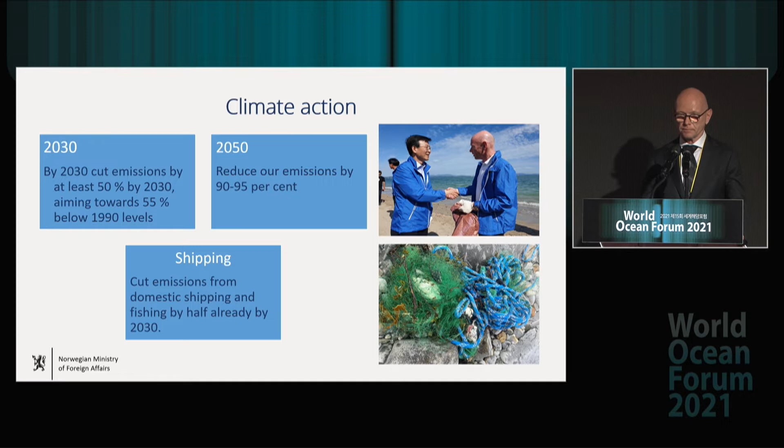If we are to reach our objective of a low-emission society and promote clean and healthy oceans, we must successfully develop, adapt, and implement new technologies in several areas. Emission reductions in shipping can be achieved both through energy efficiency and by using energy from renewable sources and low-emission fuels. Norway's objective is to establish the most efficient and the most green maritime sector in the world. And the change in the maritime sector in Norway is happening fast, as we speak.

The cruise ship operator Hurtigruten launched the world's first hybrid electric expedition cruise ship in 2019. And the Norwegian company Havila is also building hybrid ships, but with another type of technology. Their coastal cruise liners will run on LNG and battery power. And the use of LNG will cut carbon emissions by 25%, and the battery package will enable the vessels to sail emission-free for several hours at a time.

And the Norwegian ferry company Norled constructed the world's first car ferry sailing on hydrogen, which was delivered earlier this year. And already next year, Norway will have more than 80 all-electric and hybrid ferries, lowering our emissions. And we have found that if we manage to have zero emission in the ferry sector, this will result in an emission reduction of 600,000 tons of CO2 every year. What's more, it can lead the way for hydrogen and other green solutions in long-range shipping.

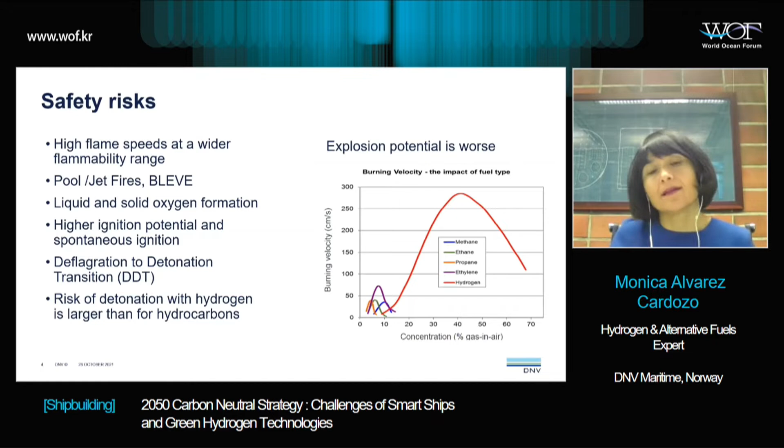We are trying to transfer technologies from land on board. And one can say, yeah, but hydrogen has been used safely on land for many, many years, so why can't we use it, or what are the risks? We can transfer the technologies, but we need to be careful because we cannot transfer all the safety barriers that are used on land. For example, on land, hydrogen is typically handled by specialists or the ones producing the hydrogen in the facilities, and they have longer experience with it. On land, it is also common to keep a distance from big quantities. Large quantities are separated, especially from public areas, and there are defined large safety zones for that.

On board, we know that the arrangements are very compact, and this is difficult. Blast walls are also used to protect from high pressures and explosions, for instance. And on board, we need to optimize the hull and keep the weight as low as possible. It's also advised on land, especially for big quantities, to put the installations in open air. And if we want a fuel that is competitive with other fuels, we need to have it below deck and in enclosed spaces on board.

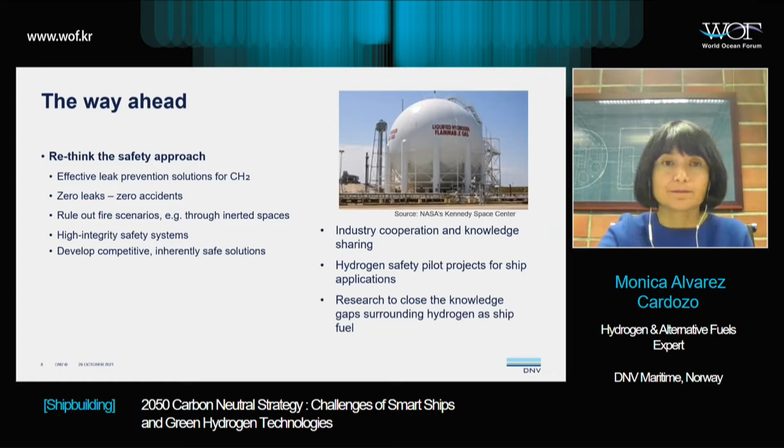We have good tools and instruments when it comes to the regulatory framework, and those tools are currently sufficient for the new projects that are pilots or demonstrators. We have the IGF Code that is covering the low flashpoint fuels, including hydrogen, having a set of goal and functional requirements that are the overall safety levels that we are trying to reach with these new designs. We already have guidelines for fuel cells that are finalized at IMO and waiting for approval.

And the tool that is the alternative design, an approval process that has been used for designs that either have a high level of innovation and do not comply with current prescriptive requirements, or that are not covered by current prescriptive requirements, such as hydrogen fuel.

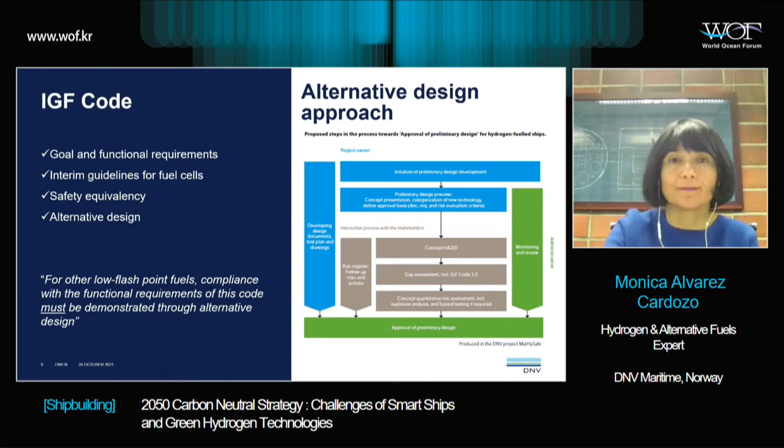We in Norway are actually lucky to see at the moment several developments around hydrogen as ship fuel. Some are cooperating projects aiming also to help the standardization and commercialization of the technologies. I would like to mention, for instance, 2 projects funded by the European Union. One is e-SHyIPS, a pre-normative research on hydrogen fuel solutions for passenger ships, aiming to help the regulatory development.

Another one is HyShip, a demonstrator vessel that will run along the coast of Norway and will help not only to demonstrate that hydrogen fuel is feasible for that ship, but also help the development of the supply of hydrogen along the coast of Norway. It's a partnership, so it's going beyond the scope of one single unit. There are also two projects worth mentioning in the joint development projects list. One is MarHySafe, and the other one is ZeroCoaster.

MarHySafe is a DNV-led project that aimed to create a handbook for hydrogen fuel vessels. The handbook was actually published just before the summer. It's available online for those that are not aware of it, and it contains the current state of the art of hydrogen safety for maritime applications.

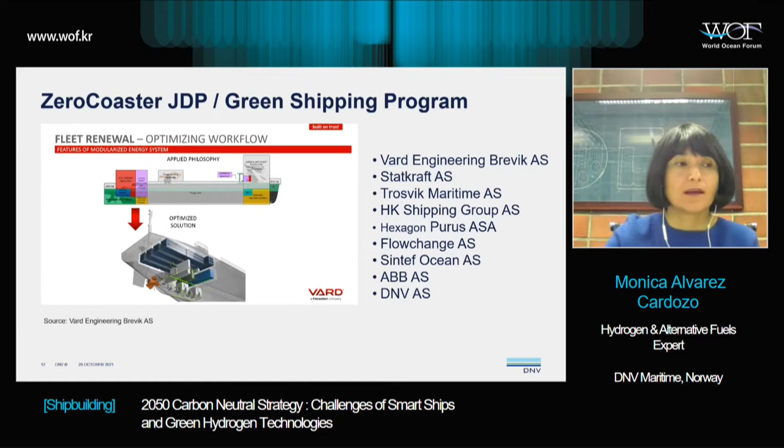We see that these projects are mainly proposed in connection with PEM fuel cells, as PEM fuel cells are the technology that is more developed at the moment among all the fuel cell alternatives.

So to summarize and to conclude, I would like to emphasize the fact that hydrogen safety is on a critical path for the decarbonization of shipping. We also need more cost-effective, inherently safe designs to allow commercialization and standardization. And finally, we need to cooperate. Industry cooperation is important, and that will be the only way to make a faster transition and to reach the goal that we all want: to see green hydrogen as a fuel in shipping.

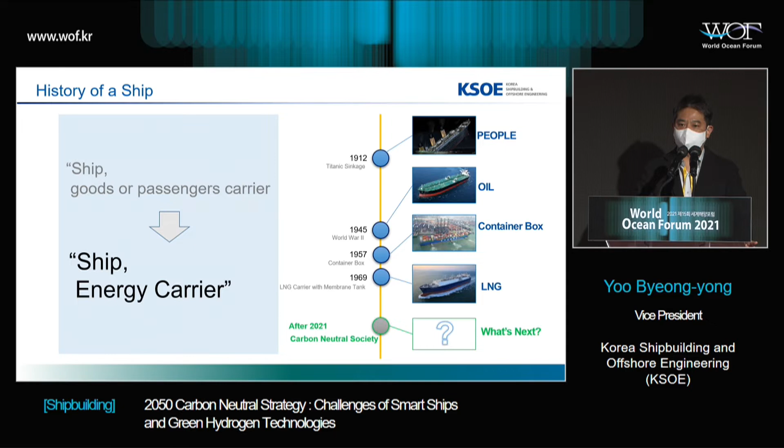So the environmental regulations and the operation of a ship itself drive the growth of hydrogen as a fuel, but the energy source, the energy mix, is a bigger driver for the development of hydrogen. Ships carry a large amount of cargoes, but now we are moving and transitioning into renewable energy, so that brings about a serious concern. Now, why is hydrogen important?

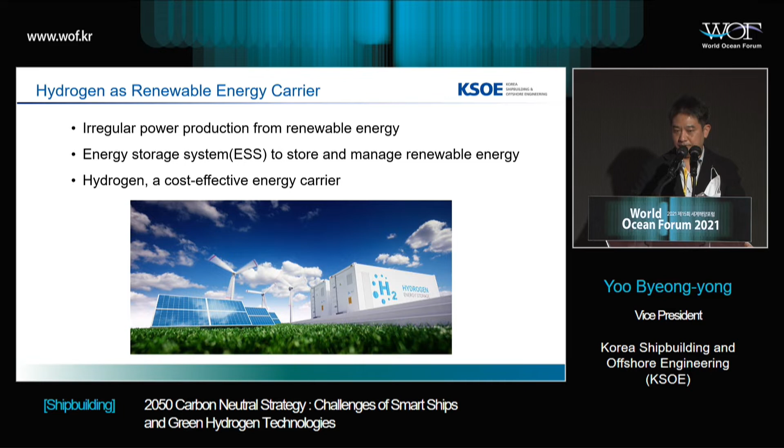Because new and renewable energy is not stable, so it accounts for only 30% of the energy mix. That is why the remaining 70% requires CCS, or energy storage, and energy efficiency is the highest with hydrogen. That is why as we move toward a net zero society and hydrogen-based economy, the role of hydrogen will grow even further. So in this case, we will see an increase in the cargo volume.

So we talk about hydrogen and ammonia, but that doesn't mean that the cargo volume will go down, but in the maritime industry, this will present a new opportunity, a new type of vessels. There are three different ways to carry hydrogen. The first is liquefied hydrogen, and the second is LOHC, or liquid organic hydrogen carrier. And the third way to carry hydrogen is

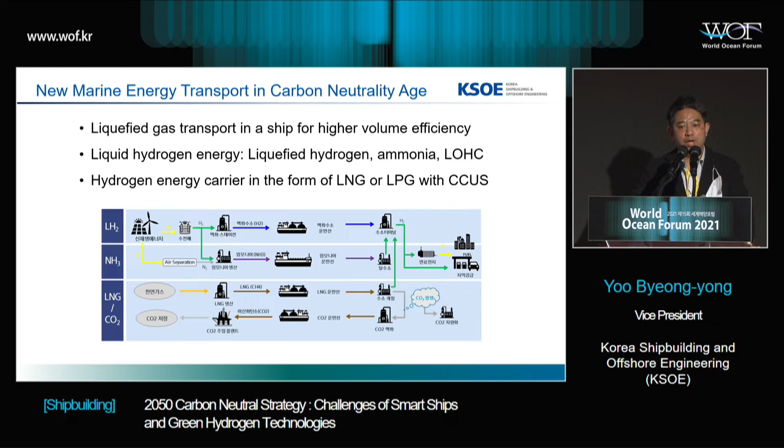to create and generate hydrogen at the point of consumption, but in this case, carbon dioxide will be generated. And to achieve net zero, we should be able to tackle this issue of carbon emission. That is why we have to turn to blue hydrogen. And in this case, we also have to consider how to eliminate carbon emissions.

So what are the carriers we can see and will see for the transportation of new energy, and what is my group doing? This is the area I'd like to focus on in the second part of my presentation. As for ammonia, this is technologically accessible.

My company ranked first in the world in terms of LPG carriers. Unlike an LNG carrier, which puts LNG into different tanks, an LPG carrier has multiple tanks, but each tank can carry a different type of gas and energy. And as for standard cargo, ammonia is registered as one of the standard cargoes, and we already have LPG carriers which carry ammonia, and we have three different shipbuilders which can build LPG carriers which can also carry ammonia.

But so far, ammonia has been just one of the cargoes for the LPG carrier, but if we are really to achieve net zero with a higher level of cargo volume, then we should have an ammonia dedicated vessel. That is why my company completed the design as well as the AIP, approval in principle, for a 91,000 cubic meter ammonia carrier. So once we have an ammonia dedicated vessel, then we will have an ammonia fueled propulsion vessel. That is why we are working on the development of such a vessel.

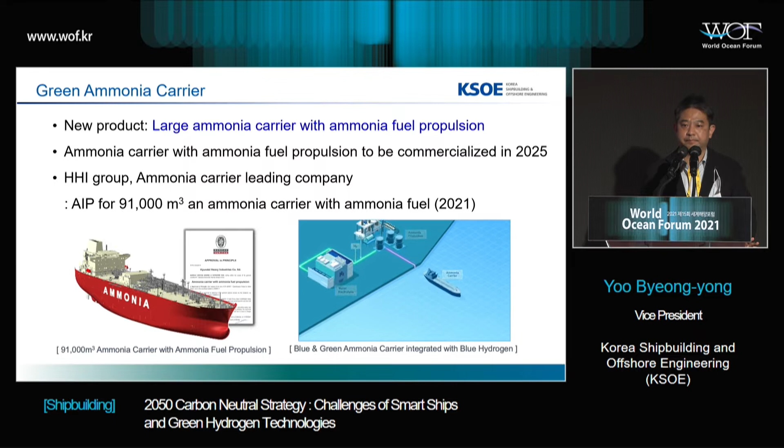Next one is hydrogen itself. On the bottom left, this is the image you might have seen quite frequently. This is a liquefied hydrogen test ship produced by Kawasaki. Some foreign media call this an experiment ship. This is not a commercial vessel. It is very long, but the tank itself is very small, so this is not commercially viable. This is only to see how stably you can run this liquefied hydrogen tank at sea.

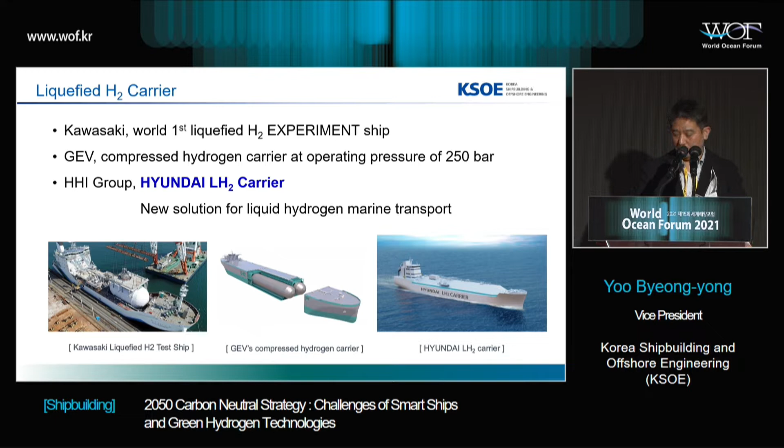And as for GEV, this company is specialized in CNG, and they are developing a CNG type hydrogen vessel. And on the far right, you can see the Hyundai LH2, or liquid hydrogen carrier. This has not been commercialized, but we are working in phases. This is to prove the safety and stability of liquefied hydrogen.

Last year, we obtained the world's first approval in principle for a commercial liquefied hydrogen carrier. And earlier this year, in collaboration with the Korean Register, we have been developing the international standard for the hydrogen fuel tank as well as the hydrogen handling system. So we have created the system starting from the ship, the standard, and then the system.

In order to reduce the concerns in the market, we have carried out various efforts, and the reason we have been able to successfully soothe the concern is because we have reduced the boil-off rate. Liquefied hydrogen has such a high boil-off rate that there is at least 20 to 30% hydrogen cargo loss during a voyage. But to prevent this, the market believes that you need a high-performing tank.

I think this concern is generated from our understanding of the LNG carrier. The LNG carrier has re-liquefaction facility, and it also has a DF engine. But since most of the large carriers have membrane and liquefaction facilities, these facilities would cost you quite a lot, which is why the market believes this is not commercially feasible.

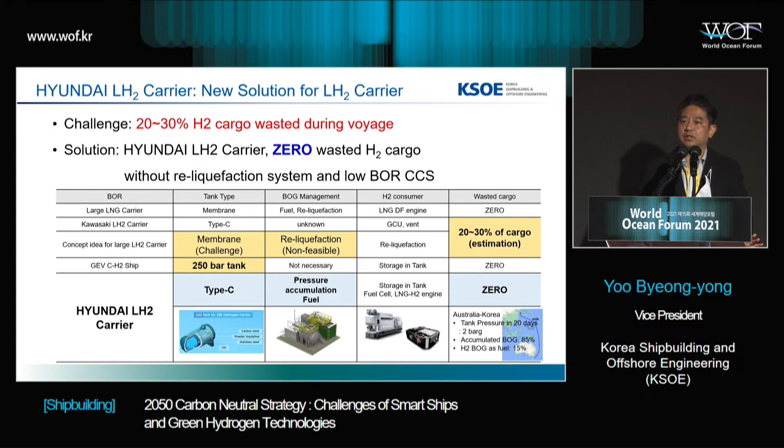Another concern in the market is the storage and infrastructure requirement on land. An extremely low temperature tank for hydrogen might be required, of course. If the size of the cargo were to grow exponentially, we would need such large infrastructure. But at this time, as we are trying to launch this technology, I think the hydrogen regasification system is more than enough.

This is the system which has been available for LNG up to this point. As you can see in the center, GEV carries pressurized gas, and they claim they can provide this pressurized gas in multiple places. But as for our LH2 carrier, we carry it without land storage, and instead we have a hydrogen regasification system enabling distribution to multiple destinations.

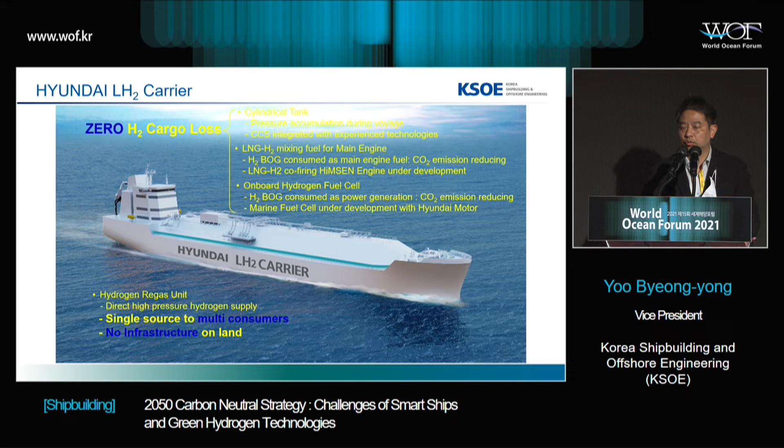So this is how the vessel would look like based on all the features I just elaborated on. This is the concept vessel, and we are now realizing this step by step. We are in discussion and conversation with overseas carriers as well.

Let me turn to the CO2 carrier. As I mentioned previously, CO2 is critical for achieving blue hydrogen, and as for the storage of carbon dioxide, the carrier can carry it to various parts of the world across the ocean. Coca-Cola and some other large companies are already using carbon dioxide carriers, but only for a small volume of cargo. Going forward, we would need a larger scale CO2 carrier.

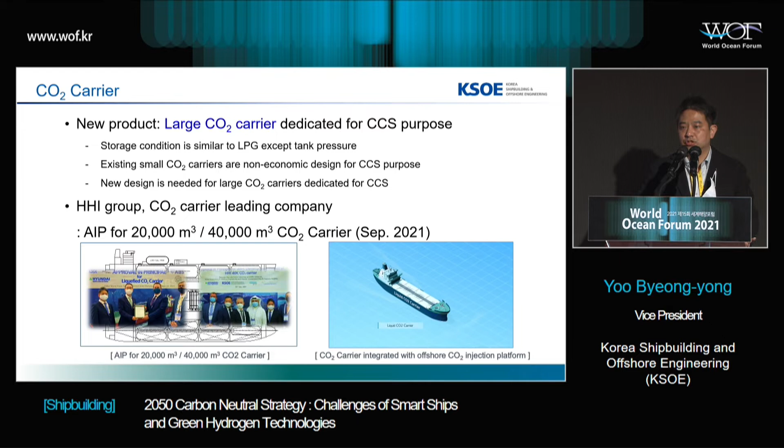That is why we obtained AIP for a 20,000 cubic meter and a 40,000 cubic meter carrier. Not just the ship itself, once the CO2 carrier becomes commercialized, we would need a carbon dioxide injection offshore platform to keep and store the carbon dioxide in the deep sea. So in line with this net zero effort, we will develop and create a CO2 injection offshore platform.

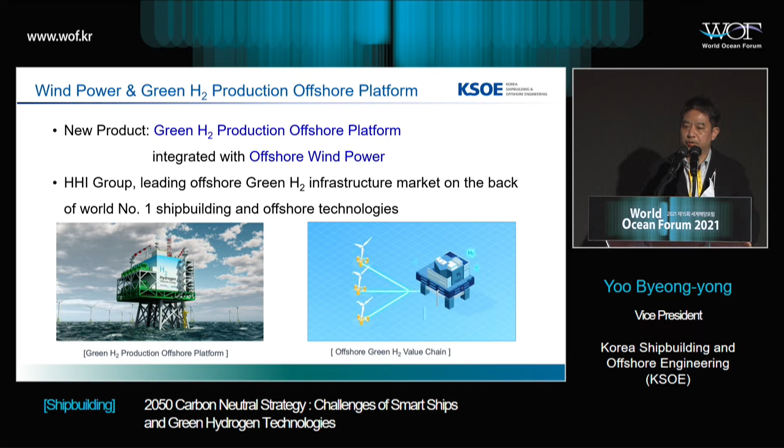Not just that, from the point of production, most of the renewable energies are generated through offshore facilities, so we will create an offshore wind farm. In other words, we are developing as a new product a green hydrogen production offshore platform integrated with offshore wind power. So I have shared with you the new products we are formulating and developing with regard to the green ship.

Although my discussion and presentation is limited to the ocean, we will cover the entire value chain, because the Hyundai Group has various points across the entire supply chain, by 2030. So we will continue our efforts to develop hydrogen-related solutions. Thank you.

Thank you very much. So in this era of carbon neutrality, as we strive for carbon neutrality, he talked about the efforts in the shipping industry, and I'd like to thank Yoo Byeong-yong from Korea Shipbuilding and Offshore Engineering.

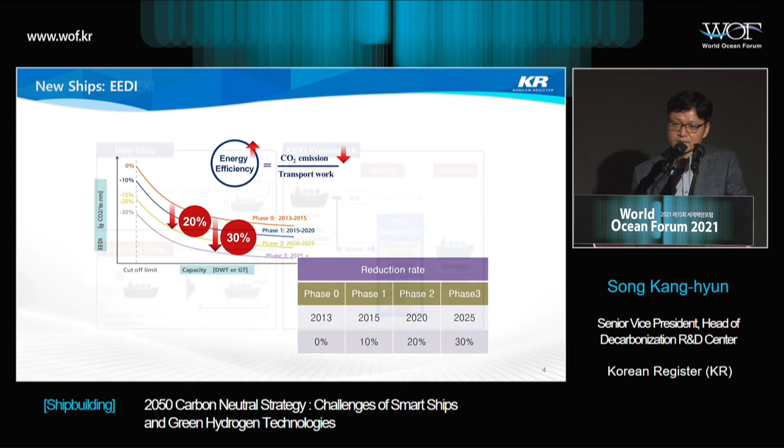EEDI is applicable to new builds, but for the existing ships, in other words, the ships that were constructed before 2013, which represent about 70% of the vessels, currently they have no regulations, and so it's not really fair.

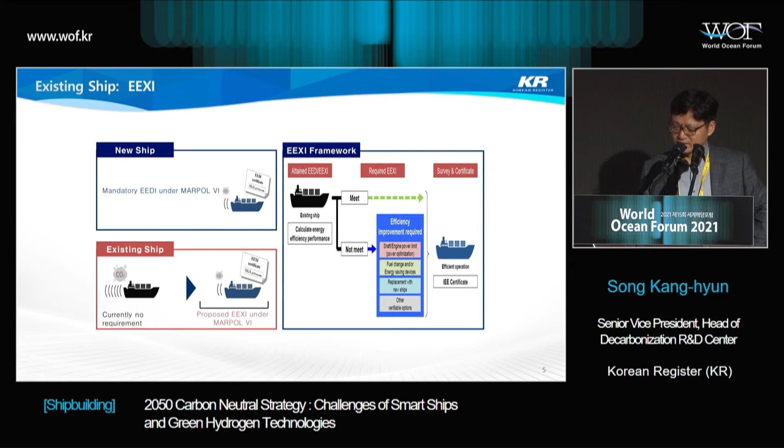So for existing ships, IMO has come up with the EEXI to set limits for the operation of existing ships. This is the requirement for energy efficiency, and all of a sudden you can see that the ship owners now have new requirements to dramatically increase energy efficiency for existing ships.

In other words, the ships that are constructed before 2013 now have very stringent requirements that they have to increase efficiency dramatically. And also for phase 2 and phase 3 ships, they don't really have to increase efficiency to continue operation.

If they fail to meet EEXI requirements, then the ships have to be demolished and removed. And even if they fulfill the EEXI requirements, next year they have to again be verified. If they fail for 3 consecutive years, then the ship owners will receive a huge penalty. And the requirements are going to continue to be strengthened.

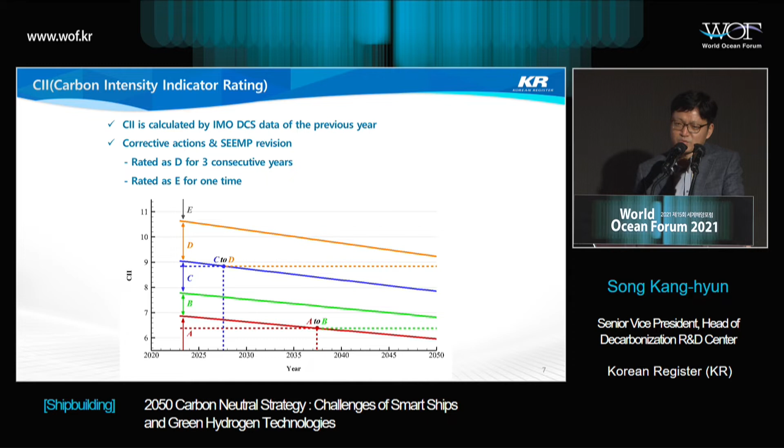For example, fuel oil based ships, if they receive the rating C, and if they do nothing, then later it's going to be D. But for LNG ships, it will take some time to be downgraded to D. That's why it gives business advantage to the LNG ships, and that's why I think the IMO has adopted this kind of methodology.

Here you can see the timetable. It was adopted this year, and by 2023, companies are required to prove that they fulfill all the requirements. Then the new regulation will enter into force. After one round of the overall assessment, they're going to readjust the requirements and maybe further strengthen them. So the current CII regulation, especially in European countries, I believe, will be strengthened further.

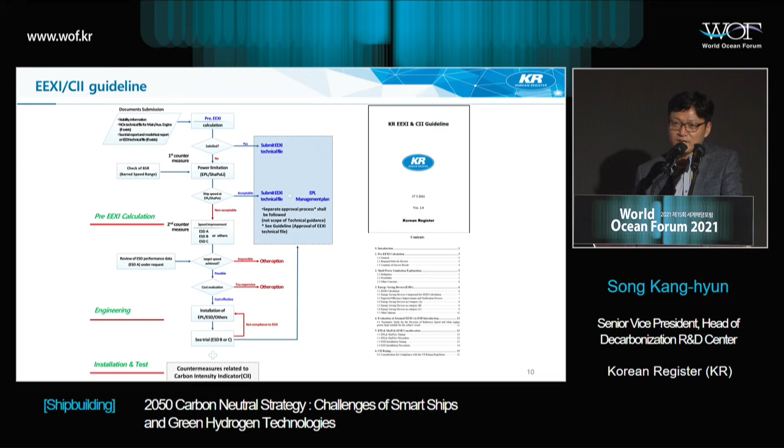In order to meet the requirements in EEXI, the most efficient way is to slow down the speed. However, then there are issues with the chartering agreement. So if need be, then energy retrofit or energy saving device installation can also be utilized as a way, but then it also induces cost burden. So if it's too costly, then sometimes it may be better to demolish the ship if it's too old and less efficient.

So we did the monitoring and assessment of the existing ships, and you can see that even the new builds that are built with the EEDI, as for the bulkers, 30% failed to fulfill. Only 80% of the existing ships failed to fulfill.

In order to meet the requirements, they have to lower down the speed. If it's within 20%, then it doesn't really have implications. But if it goes over 30%, then it will start to have huge impact on businesses.

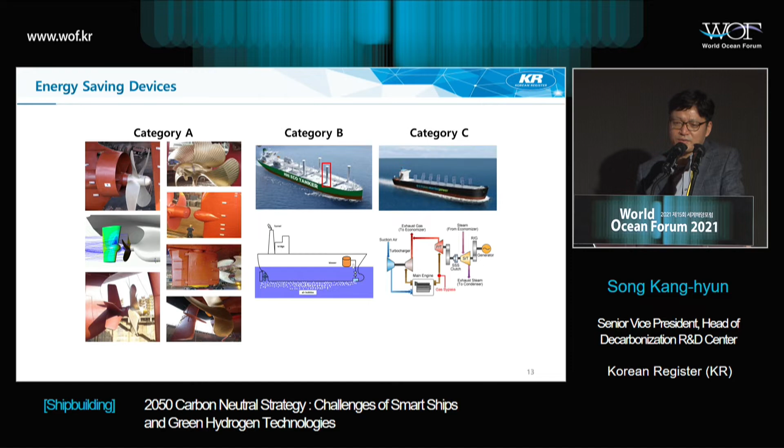In order to improve energy efficiency, various measures can be utilized. One of them is the installation of energy saving devices, and various devices have been developed in category A, B, C. Category C is about the recuperation of waste heat.

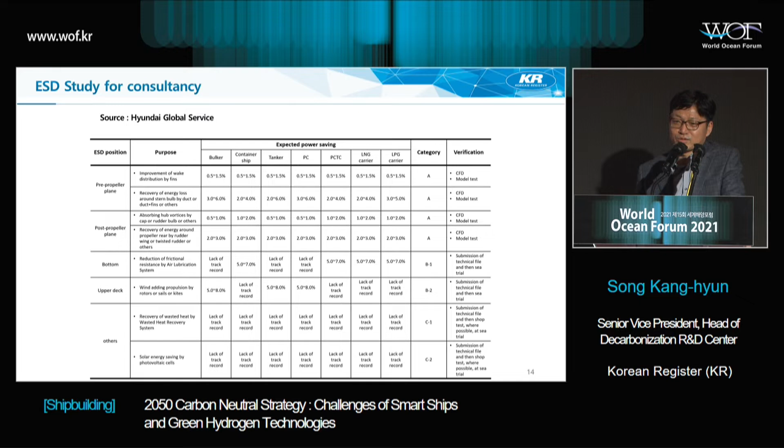Hyundai Global Service recently announced this data, and you can see that mainly a 3% or 4% energy efficiency improvement effect can be achieved. This shows that no matter how hard businesses struggle, it's very difficult to improve energy efficiency by more than 10%. So EPL can be a way, and if it's not enough, then EPL with the energy saving device.

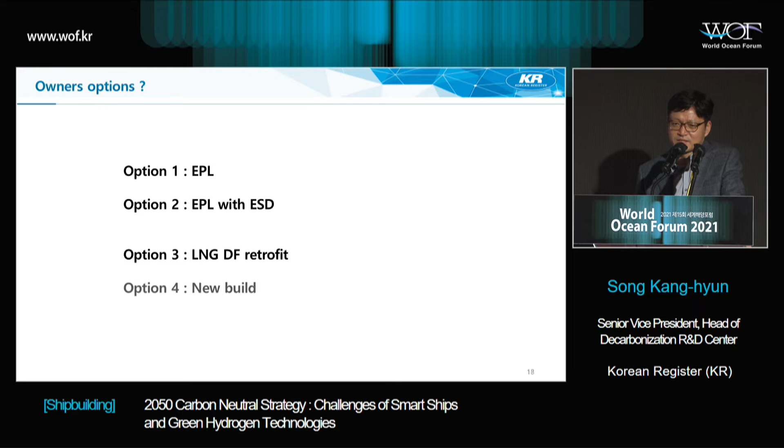Again, if option 1 and 2 are not available, then LNG fuel retrofit can be considered, but it's very, very costly. So we have to think about the economic benefit as well. If all three options are not available, then we have to go for option 4, which is a new build. You have to think about the capex, opex, remaining service life, as well as the time for engineering installation verification, and the cost for the retrofits.

That's why we have to devise specific solutions for each ship. So KR has come up with software in order to assess the impacts from EEXI and CII.

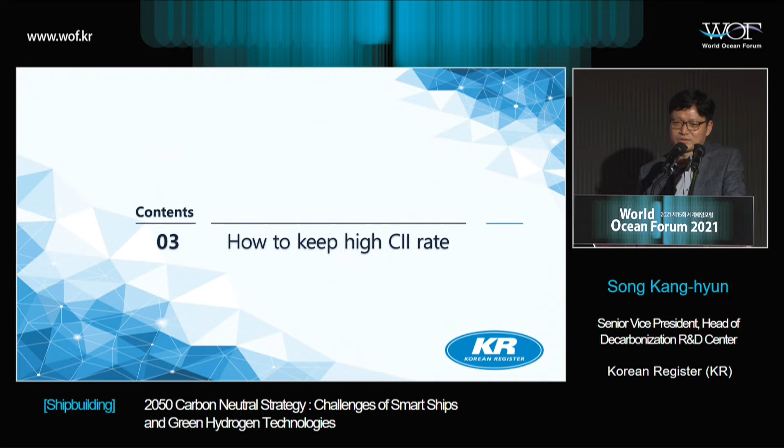Now I would like to talk about how to improve CII. EEXI is a kind of one-off assessment, but CII is like a lifelong assessment. So you have to continuously receive this verification.

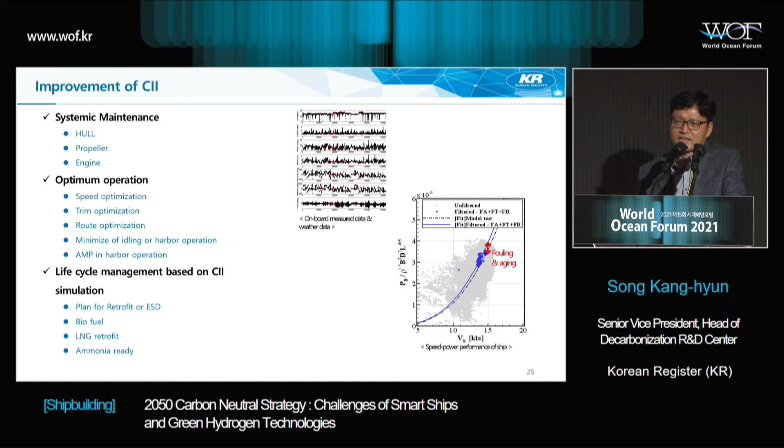You can see that the CDE ships, which are subject to fines and penalties, actually represent 80% of the existing ships. So in order to improve CII, you have to have systematic maintenance, and you also have to achieve optimum operation through speed optimization, trim optimization, route optimization, as well as minimization of idling during harbor operation. Also, lifecycle management based on CII simulation is required.

So the difference lies with the distances. A had a very high speed, and it traveled a very long distance compared with B. So fuel consumption for A is 500 and B is 415.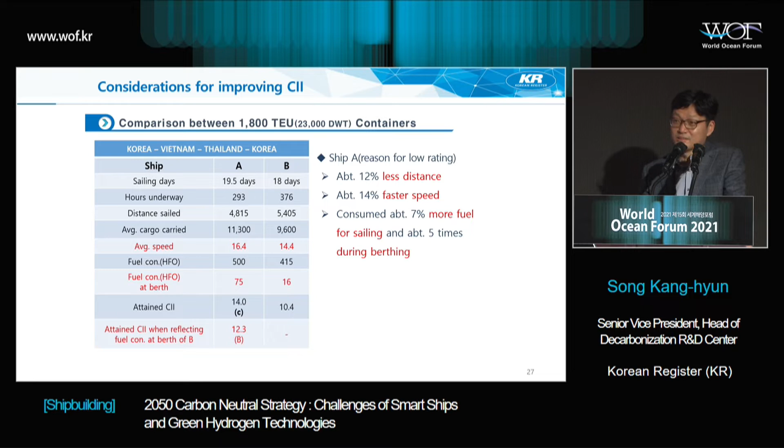But the fuel consumption at berth, A is 75 and B is 16, which means that B shortened the time for harbor operation. So if you could shorten the time of harbor operation for A, then A can actually receive the B rating. This means that optimization of operation is critical to improve CII.

So after the disclosure of CII, I think it's going to impact the shipyard as well. In the past, shipyards produced high quality ships and delivered ships - that was their mission. But with the birth of CII, now they receive new requirements that they have to provide lifetime assessment management. In other words, they have to provide various kinds of after-sale services in order to have business competitiveness.

Again, in the end, the existing ships have to slow down the speed. So I think this will increase the demand for new builds. So far I have talked about the short-term and mid-term measures. Now let me turn to mid to long-term GHG response measures.

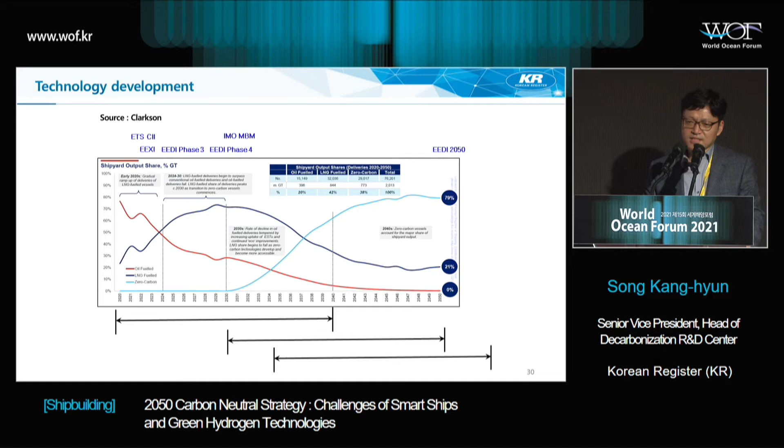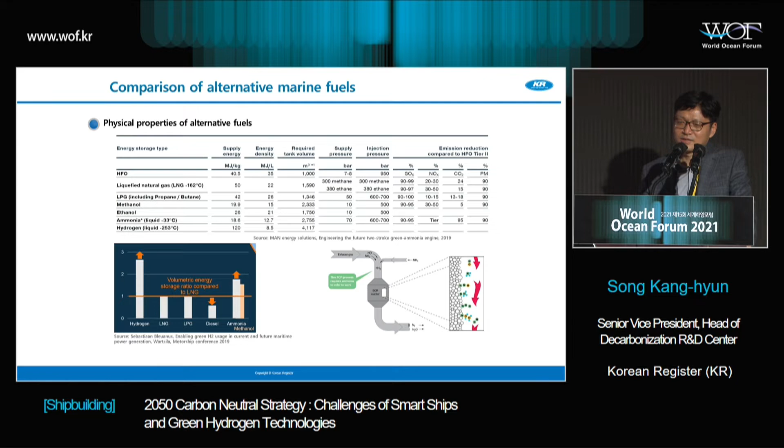And as for ammonia and hydrogen, they are not economically viable at all right now. If you just compare the fuel tank, you can see that in terms of storage efficiency, hydrogen requires a 3 times larger tank than LNG. And also compared with FO and LNG, hydrogen and ammonia are very expensive. So they don't really have a competitive edge right now.

But the IMO market-based measures, as well as the EU ETS, which was announced together with Fit for 55 recently, say they're going to provide incentives if companies reduce GHG emissions, and if companies fail to reduce GHG emissions, they are subject to fines. In other words, if they utilize ammonia or hydrogen and succeed in reducing GHG, they can enjoy various kinds of subsidies and incentives.

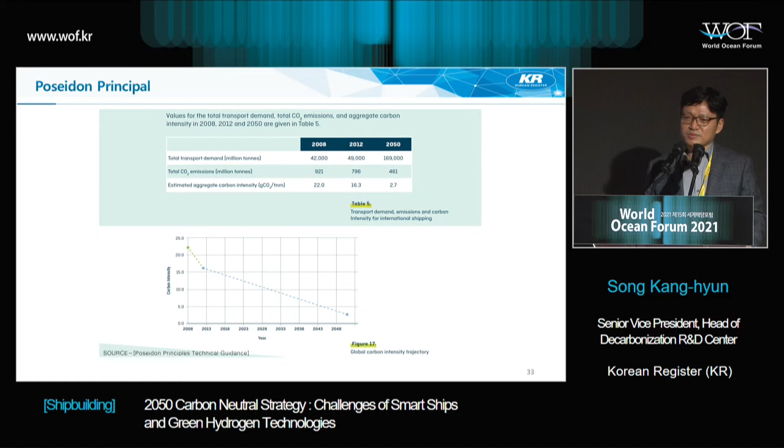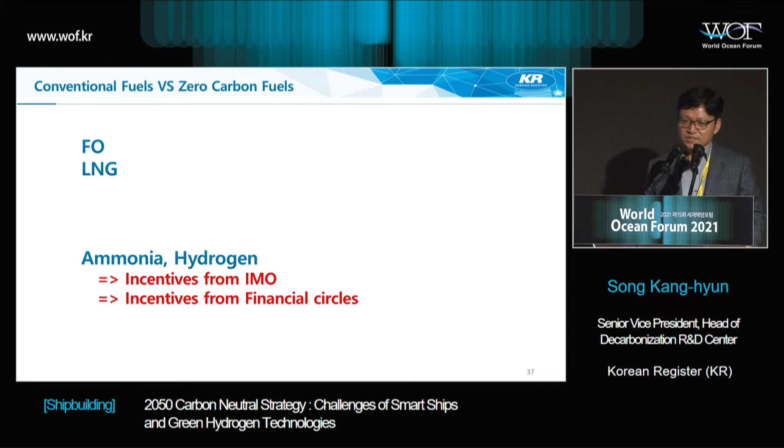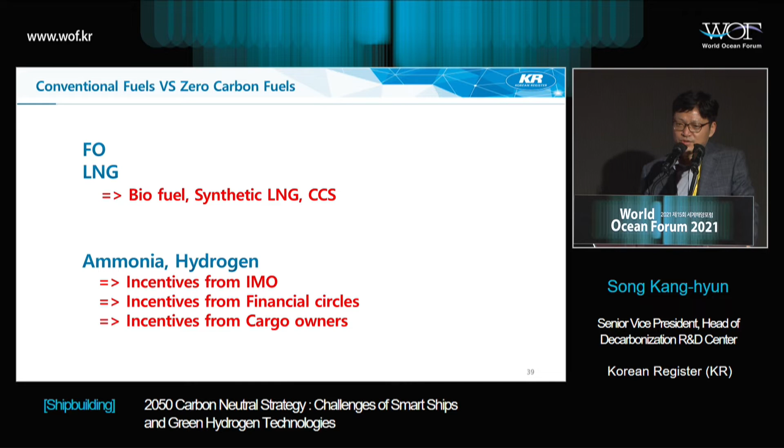And also, even for the route of operations, various benefits are provided to eco-friendly ships, and shippers no longer prefer polluting ships that produce a lot of GHG. So at this point in time, ammonia and hydrogen are not economically viable at all, but through the incentives provided by financial institutions as well as shippers and cargo owners, I believe these new fuels can gain attractiveness and continue to strengthen their competitive edge.

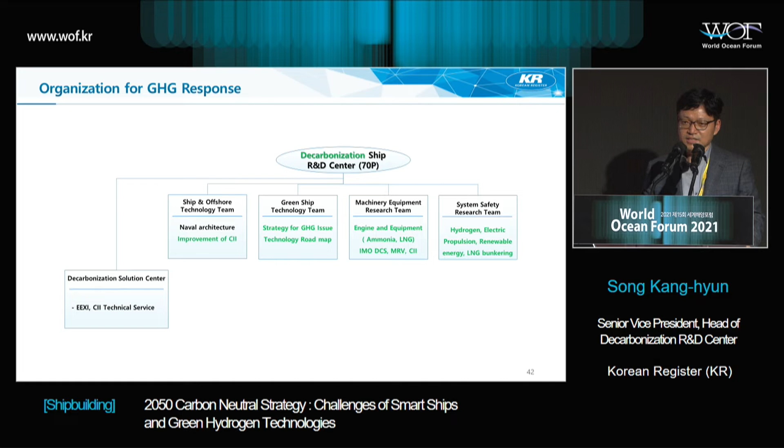That's what IMO pursues. LNG is also welcome, as is biofuel. So I believe that the winner really takes everything. So in order to have an alternative fuel that can take everything, we have to develop technology. And regarding that, I'd like to talk about KR's GHG activity.

Here you see the org chart: biofuel, synthetic fuel, carbon capture. We are focusing on technological development for these fuels. Ammonia is going to be widely adopted after LNG. Even for the transportation of hydrogen, ammonia is very likely to be utilized. So I believe ammonia will soon be established as a common marine fuel and infrastructure is going to be put in place. Currently we are conducting various research on ammonia and hydrogen.

After ammonia, we will rely on liquefied hydrogen. Engines and fuel gas supply systems are now actively being developed for ammonia. Ammonia is very likely to be utilized soon. However, when it comes to liquefied hydrogen, the technological barrier is still very high. Therefore, for liquefied hydrogen we are conducting various research projects, whereas for ammonia we are conducting various demonstration projects.

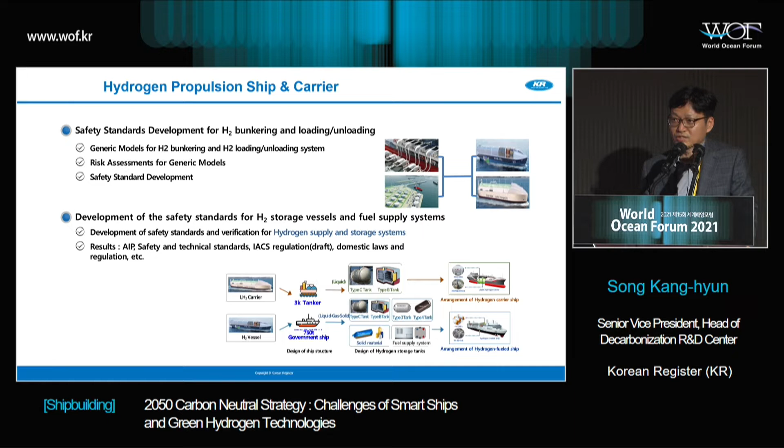We should not lose leadership in hydrogen, and we should not be the latecomer. That's why we are focusing on R&D for hydrogen, and the electric propulsion system is also critical, so we are conducting various activities there as well.

IMO regulation has been revised heavily recently, and it creates a lot of uncertainty, and it is likely to be further strengthened. Therefore, shipyards, shipbuilders, and shipping lines really have to pay attention to how IMO regulation is going to be enforced. And we don't really have a one-size-fits-all answer to this question.

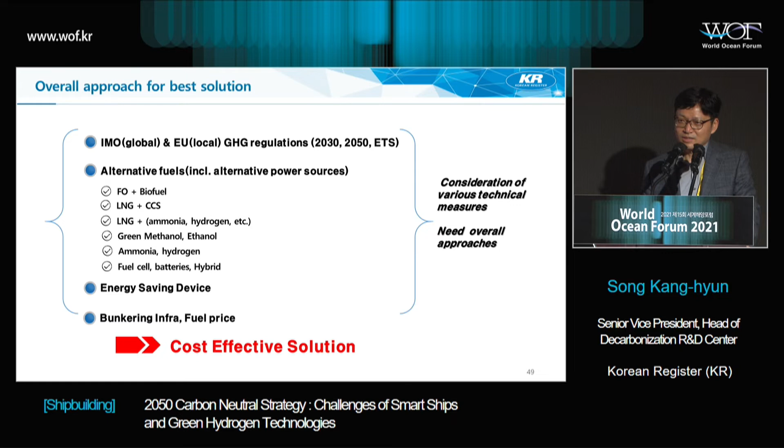Maybe we can have a combination of fuel oil and biofuel, or LNG plus CCS, or green methanol, ethanol, ammonia, fuel cells. Various options are now open and available, and we have to establish a framework for comprehensive management before we find the most cost-effective solution. When there is no clear answer, I think this is how we have to go forward. Thank you.

Thank you for a very informative presentation on how to respond to the IMO greenhouse gas regulation. I'd like to thank the presenter, Mr. Song Kang-hyun of Korean Register. Many people around the world, especially in the shipbuilding and shipping industry, are joining us virtually.

What the three presenters shared with us are topics discussed quite extensively in various fields, but how feasible they are, how probable they are, how well prepared we are, and especially what kind of impact they will have on carriers and shipbuilders.

From the perspective of OPEX and CAPEX, as discussed by Song Kang-hyun, Mr. Song has shared with us very practical ideas. I believe your presentation will be of great help to those in the shipping and shipbuilding industry. Once again, I'd like to thank you for your presentation. Let me move on to the fourth presentation.

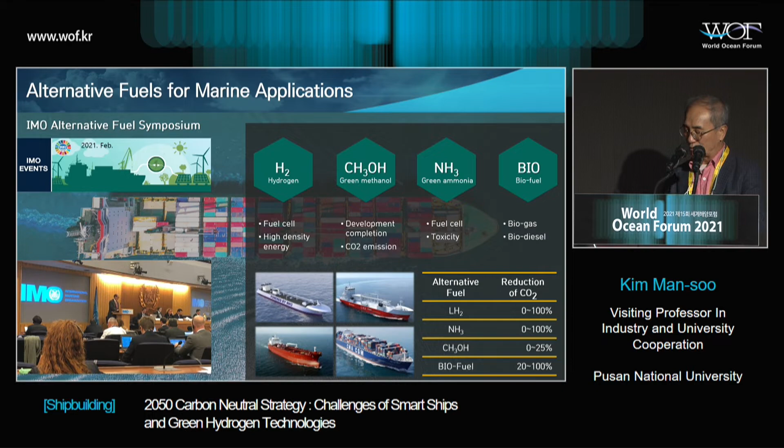In February this year, there was an IMO alternative fuel symposium, held virtually because of COVID-19. And there was an intensive discussion on alternative fuel, as you know all too well. Hydrogen, green methanol, green ammonia, biofuel. These four types of fuels were discussed as alternative fuels. As you can see on the table, those four fuels were discussed because we can make a significant carbon dioxide reduction.

With regard to this, nations around the world are researching alternative fuel options, and some of them have already conducted a demonstration. Norway and France have flagship projects, Danish company Maersk is piloting with biofuel, and the United States is testing hydrogen fuel and biofuel. As for Korea, we are testing and developing various next generation fuel options.

As for the alternative fuel options, as for biofuel, we have some examples such as HVO or FAME, fatty acid methyl ester, but fuel supply infrastructure is not fully established. As for methanol, you can store methanol at room temperature and atmospheric pressure. However, you would consume fossil fuel in producing methanol.

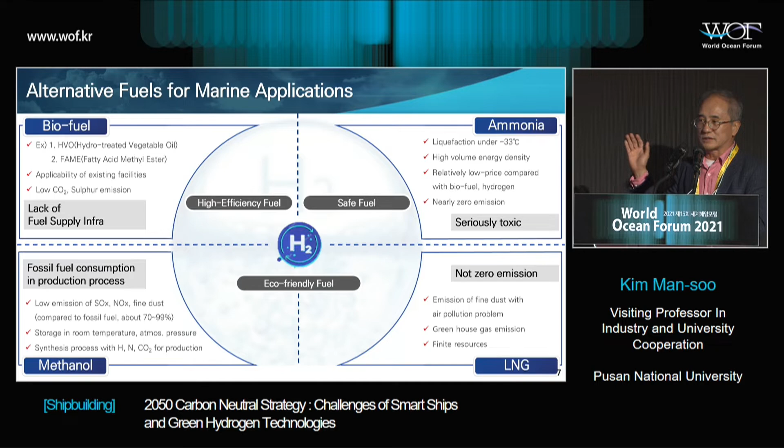As for ammonia, it has relatively high volumetric energy density, it is relatively low price, and it is almost zero emission. However, it's seriously toxic, so this has a toxicity issue. As for LNG, this is like an interim or transitionary fuel, but it is not really a zero emission fuel. So these options are available and each option has its own advantages and disadvantages. If you put this all together, then you have the basis for producing hydrogen. So we are in a transitioning period to move into full-fledged hydrogen fuel.

This slide shows you the world hydrogen ship technology trends. For demonstration, there are various products and projects. In the far left, this is a hydrogen ship in a German lake. Next to that is the MF Hydra flagship project of Norway. The next one is the Japanese transport vessel, Suiso Frontier. The next one is the Water-Go-Round of the United States. The PEM method was applied.

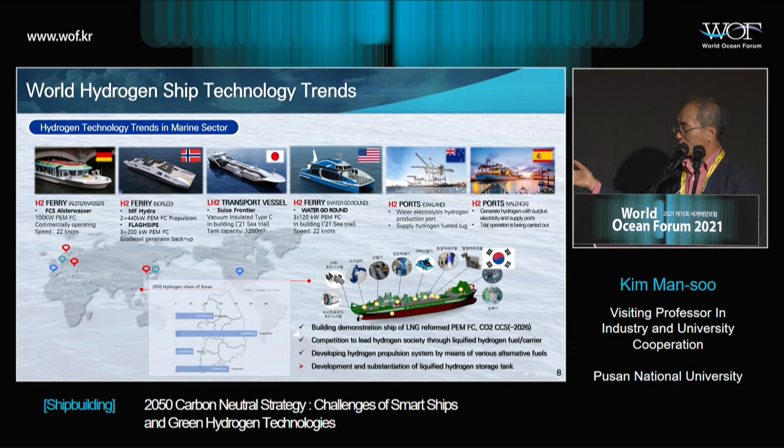As for H2 port, we can see it in the United States and Spain. And in Korea, my university, Pusan National University. The plan is to build this vessel by 2026. This uses PEMFC, and it has a CO2 capture system as well. So this is the plan, which is underway.

I'd like to turn to key technology for hydrogen ship. In the far left, you can see the image. With a C-type tank, you can achieve a BOR of 0.3% per day. The insulation is done using polyurethane foam. So for LNG using polyurethane foam, this kind of latent heat, saturated temperature, and BOR properties can be produced with a 300 millimeter thickness of insulation.

If you apply these characteristics to liquefied hydrogen, then the insulation thickness should be 3,300 millimeters. So in this case, this is not viable or feasible at all. So this is a very fundamental research that was done.

And this is what has been researched by NASA, the United States. If we use liquid hydrogen, then we need to get some help from vacuum system. So we have three different scenarios: low vacuum, mid vacuum, and high vacuum systems. In the far left, we have low vacuum system, and there you can see the vacuum pressure is 1,000 millitorr.

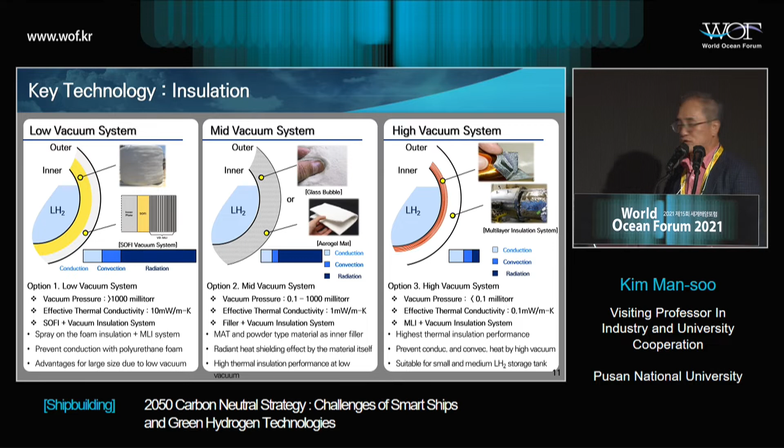And as for filler, glass bubble or aerogel mat can be used as a filler in order to adjust the conductivity or radiant heat shielding. And the last one, high vacuum system. The vacuum pressure would be less than 0.1 millitorr, and the conductivity would go as low as 0.1. So high thermal insulation performance would be fully utilized to prevent conduction and convection heat. So this is suitable for a small-sized storage tank.

This is the case of Kawasaki. This was covered already. They are researching this 160,000 cubic meter liquid hydrogen carrier. The overall trend is more or less the same as LNG, but this is to see whether they can work properly if the temperature is about 100 degrees Celsius lower. So it has BOG management system and cargo handling system, as well as the cargo containment system. So these are the areas of potential research going forward.

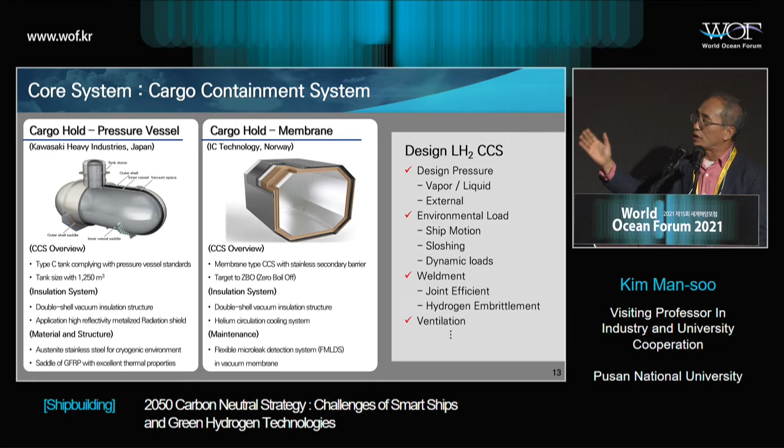This was done by a Norwegian IC Technology. This is a membrane type. So for CCS, it uses stainless steel. The target is zero boil-off. As for the insulation system, it introduced a double shell vacuum insulation structure and helium circulation cooling system. So these are in the demonstration stage or development stage.

And there is a re-liquefaction system. As for the re-liquefaction system, the tank pressure accumulation system should be in place. Then this system should be able to minimize the hydrogen loss. And the emergency system needs to be in place as well, because hydrogen can cause explosions if it is not handled properly. And it also requires loading operation system.

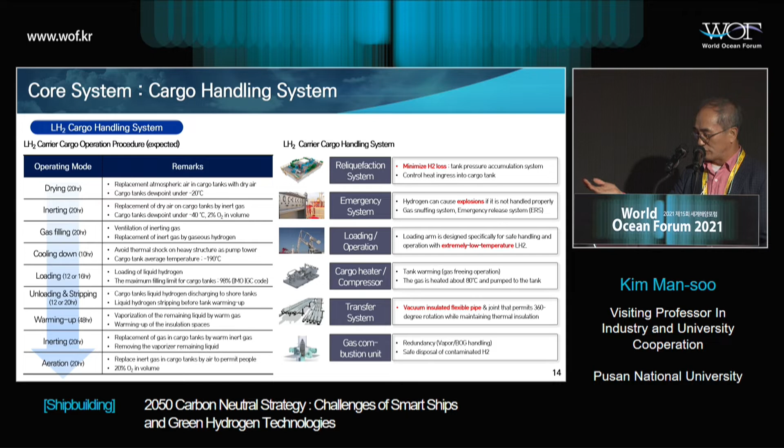And this also needs to include the cargo heater, compressor, transfer system, because all the pipes need to be vacuum insulated, and double pipe needs to be implemented for insulation. Last but not least, a gas combustion unit is also required for cargo handling.

The next one is BOG handling or BOG management. Just like the LNG, liquefaction is required, but nitrogen is used for LNG. In the case of hydrogen, cold helium would be used for primary cooling. This is for the re-liquefaction. And there should be another type of research required to minimize the energy consumption of the liquefaction system. As for the boil-off gas, it should be able to be utilized for fuel, or it should be able to be recycled. So this is the diagram that captures that idea.

I'd like to turn to the hydrogen economy development plan by the Korean government. As for the hydrogen roadmap, the government's goal is to scale up hydrogen production and to establish industry infrastructure and the supply chain, and then to scale up the supply chain of hydrogen.

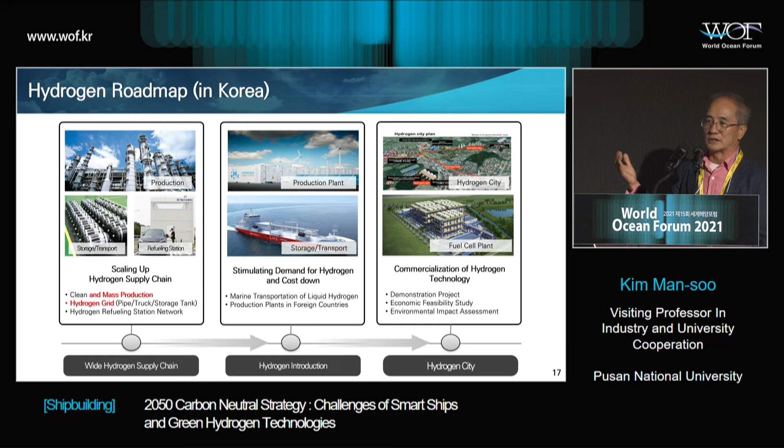And the government is also aimed at reducing the cost for production plant as well as for storage and transportation, so that mass transportation will become affordable and available. And the last pillar would be to build hydrogen city with hydrogen fuel cell plant with the fully commercialized hydrogen technology throughout the society. So this is a blueprint set forth by the government.

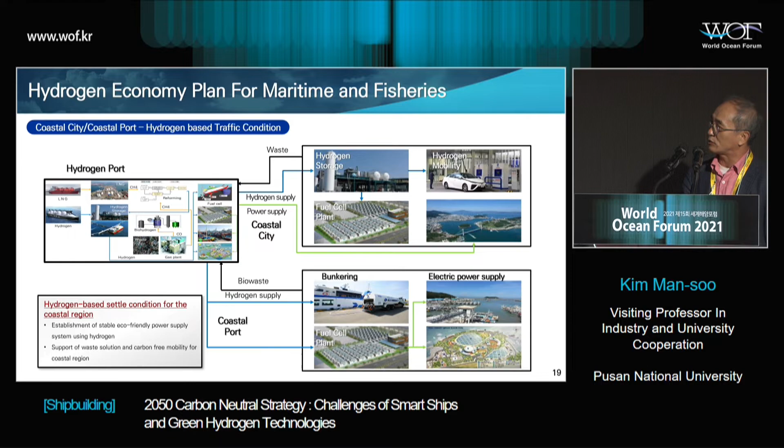As for the ocean renewable energy, we have a wind farm, offshore wind farm and onshore wind farm. We have tidal wave related renewable energy generation. With this, we can generate hydrogen using water electrolysis. And we can use the hydrogen as a fuel for the vessels.

Let me conclude. If you take a look at the hydrogen energy value chain in the industry, we have the production, storage, the vessel, which represents transportation, and application. All the key technologies need to be scaled up. So this is a summary of my entire presentation. In order to do this, there should be verification, eco-friendly considerations, as well as the government policy framework. All these things need to be taken into consideration in its entirety.

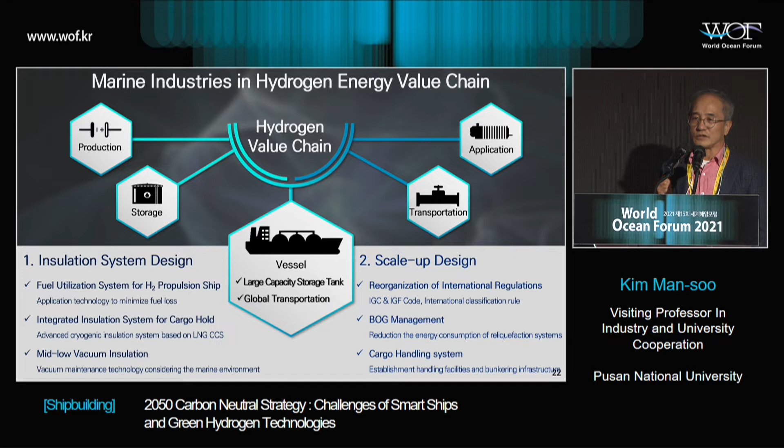My university, in order to facilitate the development of the hydrogen industry, will host a forum in Korea in November. I'd like to invite all of you to the forum so that we would have a better understanding and we can embark on an in-depth research into hydrogen ships. This concludes my presentation. Thank you.

Thank you very much, Professor Kim Man-soo. He talked about the technological trends as well as the marine hydrogen economy. As for the propulsion system, I myself have engaged in this field for a long time, and recently I have conducted a lot of research on green fuels. But as you know, the hydrogen platform has become a buzzword, and it has been widely covered by media, and also government has come up with various policies.

And listening to Professor Kim Man-soo's presentation regarding the propulsion ships, the hydrogen platform, and all the things that are required to build them, as well as the systems and roadmaps and operations, I found that very interesting. He also talked about how other nations are doing, and gave us very detailed descriptions on their plans. So I believe Professor Kim's presentation might have been very useful to our online and offline participants in understanding what kind of technologies will be required and what will be the challenges and opportunities.

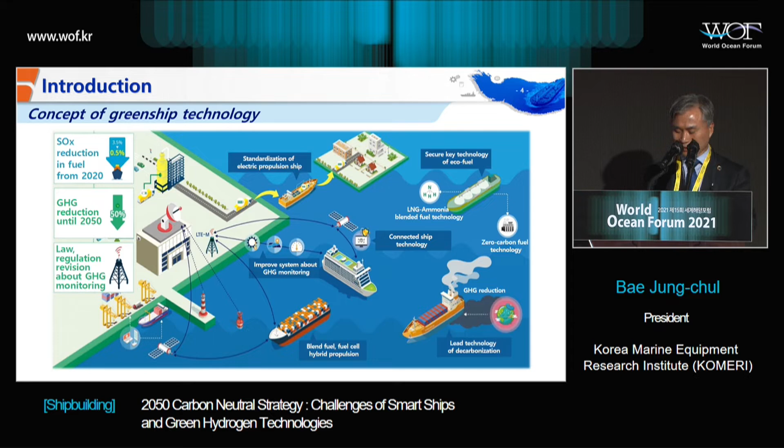And in order to develop leading edge marine equipment, technological development is important, but legislation and establishing a legal framework is also very important. We also have to take leadership in international standardization so that the equipment developed in Korea can dominate the global market, therefore creating the so-called super gap.

In order to develop green ships, we have to succeed in energy transition. In other words, from the very phases of energy production to supply and transportation, we have to develop the eco-friendly approach. And even for the fuel storage on board, and also the fuel supply system for the engine, although the name fuel supply system remains the same, depending on the fuels that are used, completely different requirements and equipment are required.

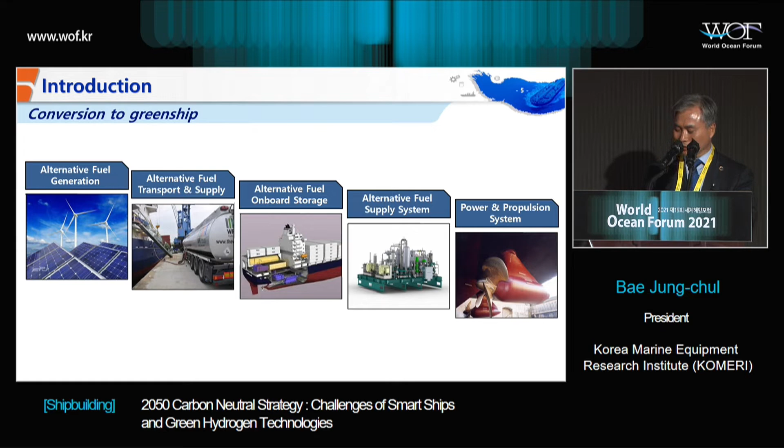And therefore, when we make a proposal for a national research project, one thing that's very challenging is that when we suggest the development of the fuel supply system, the public officers often think that we already have that, so they don't really select our idea. But in fact, depending on the fuels that we utilize, sometimes we need a completely different fuel supply system, which needs to be developed.

In order to take leadership in future technologies, we have to create a very wide gap for marine equipment technologies. The reason why I emphasize this is because starting from last year, the order volumes for shipbuilding started to increase. So for the next 10 years, the shipbuilding industry will be able to maintain the current average volume of orders. And when it comes to the marine equipment sector, I believe that we only have 10 years of guaranteed survival. In other words, while there are orders available, we have to develop and secure future technology so that we can be prepared for when shipbuilding orders decline.

So even when Korean shipbuilders fail to receive orders, we still have to maintain the businesses. And for this, we have to develop cutting edge technology so that we can export our technologies to foreign shipbuilders.

And also we have to establish a foundation for testing and demonstration. In other words, sometimes we develop very good technology, but then we fail to demonstrate it, and that could be the stumbling block for commercialization. So demonstration and verification technology is also required. And as I said earlier, we have to take leadership in setting international standards so that Korean technology can be adopted as the international standard.

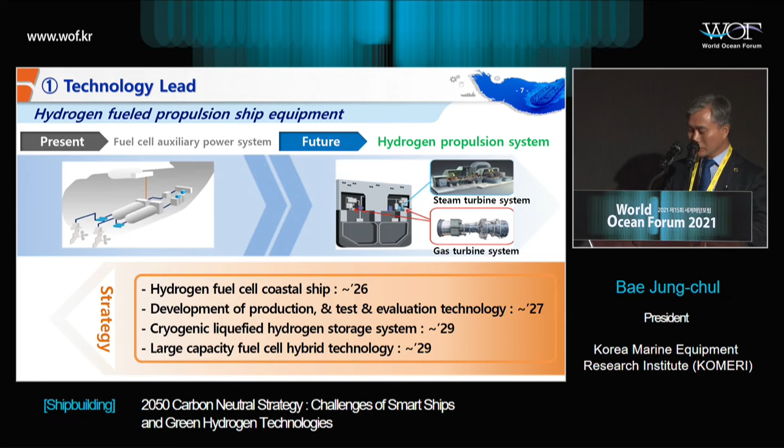But what's more important is that the shipbuilders should utilize domestic technologies for marine equipment as well. For ammonia as a fuel for ship, Hyundai Heavy Industries demonstrates global leadership, and I understand that they also developed the ammonia technology. But I hope that they could also pay heed to developing equipment as well, so that the domestic engines and all the equipment of the vessels can be secured domestically.

And when it comes to toxicity, there are a lot of issues to be tackled for ammonia to be used as a fuel. So the treatment equipment and processing equipment, I think, have to be developed.

And this is the blended fuel. As you know, LNG and fuel oil are already utilized as DF, and I understand that development is currently underway to produce low carbon blended fuel, and there were a lot of discussions and debates on the Kormarine conference that took place last week.

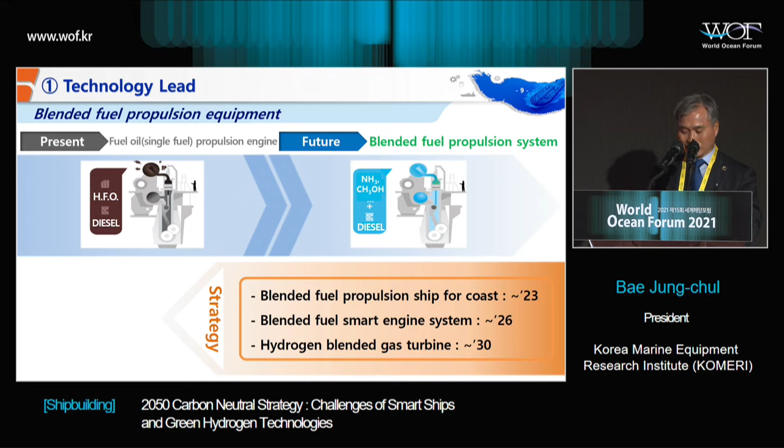And I believe that by 2030, the hydrogen blended gas turbine is going to be commercially available, which means that we don't really have enough time to develop various equipment that are required for this gas turbine. So we really have to roll up our sleeves and step up our efforts for technological development.

Next is about the electric propulsion ship. As you know, in terms of battery capacity and charging times, electric propulsion is currently applied first to coastal ships. A lot of coastal ships in Korea are converted into LPG-based ships, but there is also an effort to push forward with the transition to electric propulsion ships. So maybe starting from small scale boats and ships, we can apply electric propulsion systems, and later on we can expand that to larger scale vessels.

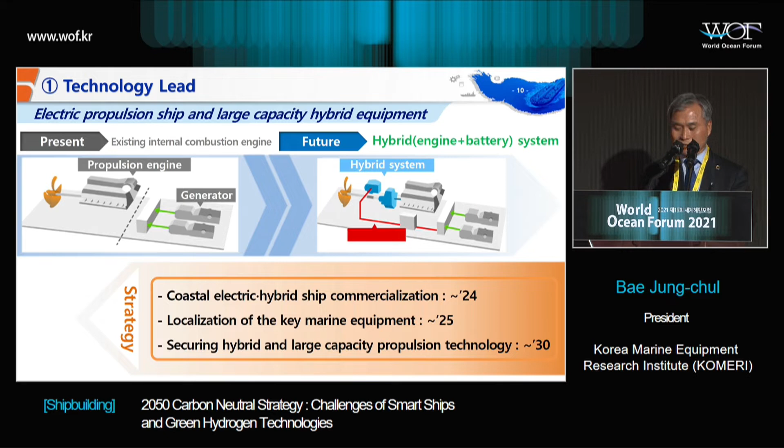As you know, already overseas, some vessels do have hybrid systems that combine engine and battery. So for marine equipment, the inverter and the electric control module, as well as superconductivity, high efficient modules - I think this is something that we can also work on. And fortunately for these three, I understand that Korean companies started the technological development already. So soon, I hope that the demonstration project will begin.

For emission reduction device, as mentioned by the previous speaker, from 2030, LNG is going to be basic for all vessels. So it's going to be mainstream. But what's unfortunate is that Korea actually received more than 90% of the LNG carrier orders. But when it comes to LNG cargo handling devices such as pumps and compressors, as well as the BOG devices,

there is a domestic company that succeeded in development, but they failed to move on to the demonstration phase. So currently, we don't really have domestic technology for this marine equipment. So in order to address these type of problems, currently we are trying to start the demonstration project. So although we are working, I hope that we can have a demonstration project soon for about 1 year.

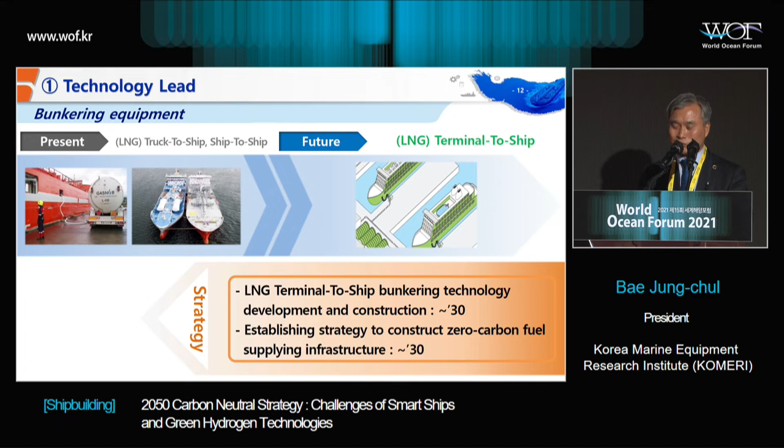And also for electric propulsion ships, low voltage AMP is not enough because it's for the commercial normal vessels. So we have to prepare for high voltage AMP in order to provide sufficient electricity for the charging of electric fueled ships. So this is something that we also have to prepare for. I believe that already the experts are talking about that, but let us build and combine our forces together so that we can facilitate the time for this infrastructure building.

Also, the equipment for energy efficiency improvement or energy saving devices - so there are a lot of demands and needs.

Shipbuilders, from the very phase of design, have to take into consideration these energy saving devices. As you know, nowadays we have a lot of lightweight modules and materials, as well as CCS, and various equipment has to be considered when shipbuilders come up with a design. So when shipbuilders build plans for developing eco ships, they have to think about how to secure eco-friendly marine equipment from early phases.

Next is about digital twin. In order to enhance operation efficiency, we have to have digital twin-based ship operation, and for this, various technologies and equipment have to be developed, especially not just for hardware, but also for software. We need to develop technologies for remote monitoring and remote control for vessels.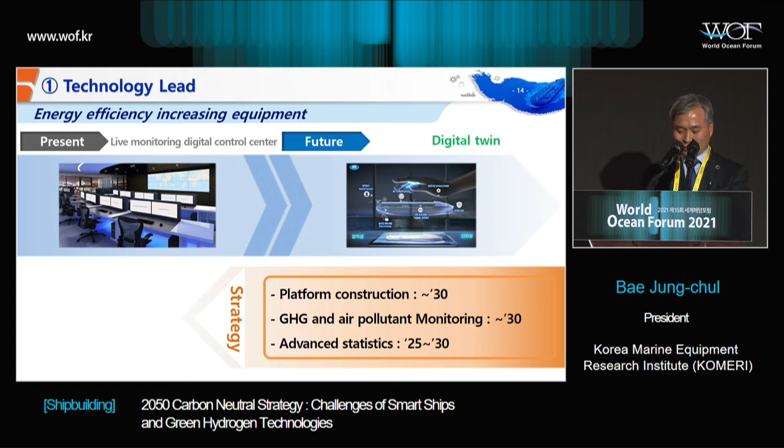Again, for this field, we have to focus on developing the right equipment. In the future, I believe marine equipment should be connected equipment. There is no such thing as unconnected marine equipment in the future. So equipment manufacturers will continue to work hard, but I hope shipbuilders will also take this issue more seriously.

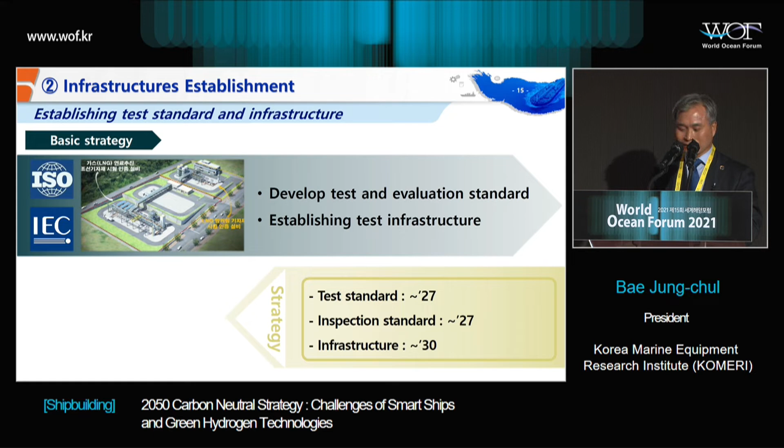This is about testing and demonstration. This LNG demonstration facility is going to be established next year, and I hope this infrastructure will be well utilized. We also have to develop technology for demonstration and verification, and our institute will lead the efforts for this.

Next is about standardization. Not just domestic standardization, we have to lead the efforts of international standardization so that Korean technology can be adopted as an international standard. Our institute is a private organization, so together with the public organization, we will continue to redouble our efforts.

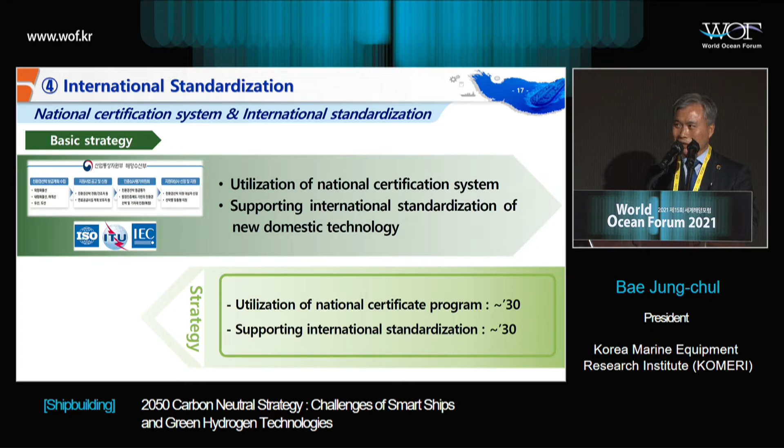So that was a very brief summary of what has been done in the marine equipment sector, and especially the message I want to emphasize is that we have to build a win-win partnership with the shipbuilders in order to develop environment-friendly marine equipment. Thank you.

As we discuss the future, smart ships, and green hydrogen technology, I'd like to thank Dr. Bae Jung-chul of KOMERI for his focused, insightful presentation once again.

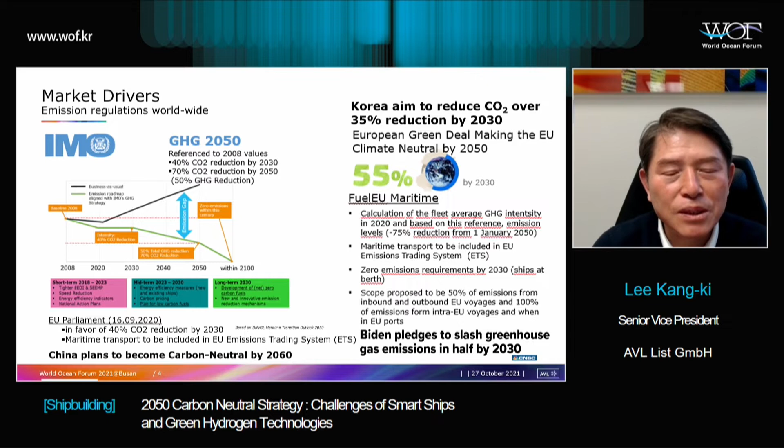So I don't need to talk about the rules and regulations. The United States and China have declared their commitment to achieve carbon neutrality. By 2030, Korea aims to reduce carbon dioxide emissions by over 35%. This is the goal declared by the Korean government, and this is an international and global campaign.

Hydrogen energy does not contain any carbon, so it is completely carbon-free and emission-free. What we need to focus on is its specific characteristics. We have to handle this very carefully, otherwise we might have some negative impact. So how do we reduce those risks? This is the key area of focus for researchers at AVL.

Hydrogen does not contain any carbon at all, so there is no smoke, no visible smoke, and it does not create any particulate matter or other pollutants, such as polycyclic aromatic hydrocarbons.

However, it has such a wide range of flammability limits. If the air contains 3 to 70% hydrogen in a mixture, it can turn into a flame. However, you need a very low ignition energy, otherwise you cannot ignite it. So these are two opposite sides, making it very difficult to use as a fuel.

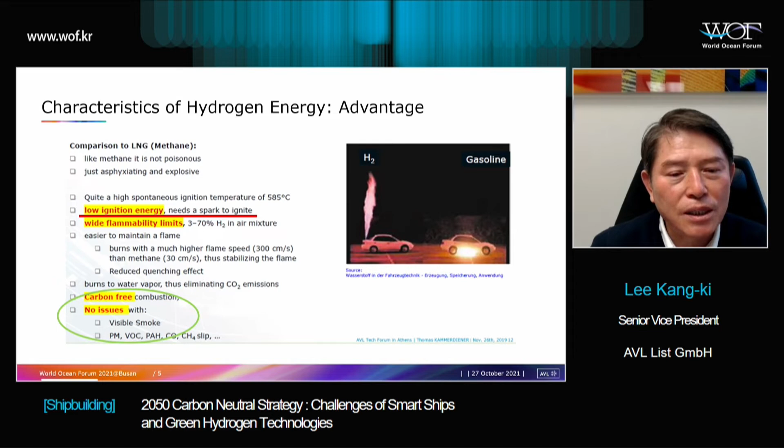It needs to burn in a confined space, and it requires very highly advanced technology. Since ignition and flame take place very rapidly, in most cases it involves stoichiometric reaction, where nitrogen and oxygen in the air go into stoichiometric combustion.

In that case, it will generate a very high amount of NOx. So for optimization of the burning, although this is decarbonization with no carbon-related pollutant, NOx can still be generated, so we have to find ways to optimize the combustion.

As you know, NOx can have a negative impact on the human body immediately. Given these properties and characteristics of hydrogen, how can we generate energy using an internal combustion engine, and what kind of process takes place in order to reduce and properly control pollutants?

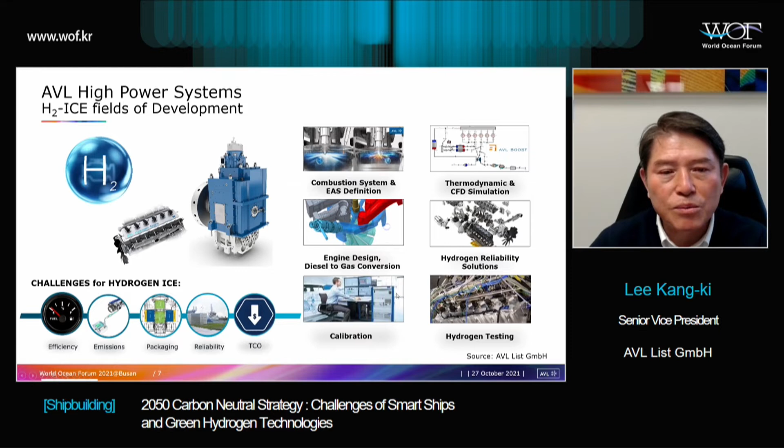These are the areas we reviewed in terms of design in order to enhance task accuracy. We also conducted calibration work. This is our testing equipment.

As reiterated by the previous presenters, hydrogen supply is not stable yet. That is why we use tank lorry for the loading and unloading. So one is used for fuel cell and the other one was used for the engine. And buffer tank was installed as well for the stable supply with 300 bar of pressure.

Going forward, for the high output testing for a longer period of time, we are planning to introduce a liquid hydrogen-related storage facility. So this is the testing result I'd like to share with you. So methane number 65 was used as the base. The hydrogen was mixed to this.

So what kind of results is delivered by hydrogen? Here you can see 3 different results. First, 30% hydrogen mixed into natural gas. The next one is 80% hydrogen mixed into natural gas. And the third one is completely hydrogen. When hydrogen accounts for 30%, the carbon dioxide emission was down by 10%.

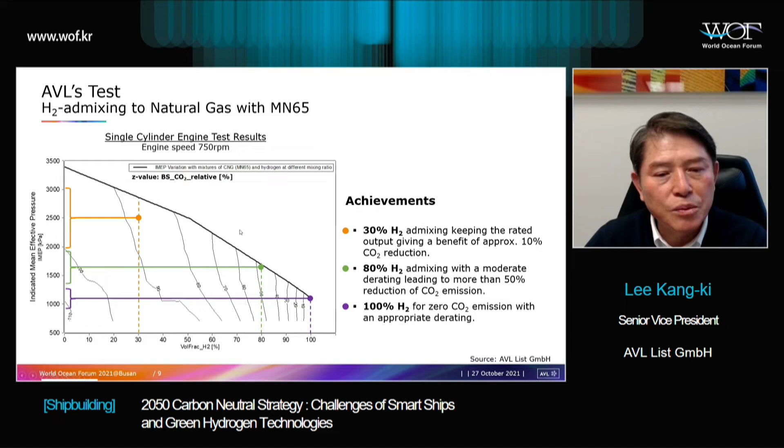Well, derating is translated into efficiency. So if efficiency is too low, then you have to use another source of energy. In this case, the total energy consumption would be virtually the same. That is why it's quite critical for us to raise the level of output.

So based on this knowledge and understanding of hydrogen, I'd like to turn to digitization or digitalization, how to create a digital platform. Director Bae put such an emphasis on the rules and regulations. Before recognizing that, I think we need to clarify the terminology here. Automation and autonomy is different, and digitization and digitalization are different.

Turning analog into digital signals, this is what is called digitization. That's my definition. And using digitized information, you can perform a certain function, and this is what I define as digitalization. And if you can take advantage of digitalization to create completely new business concepts, then this is what I would dub as digital transformation. Here you can design new modules, you can run a new tool, then that's the level of digital transformation.

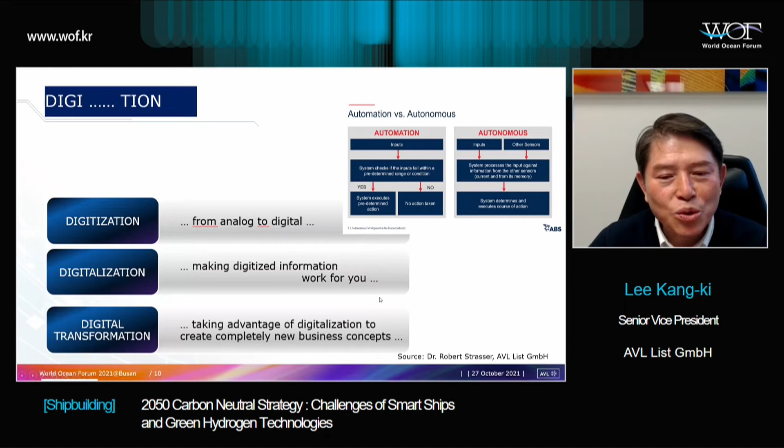When we say digitization or digitalization in Korea, well, in Korean, the term turning into digital represents all these three things. So those who work on the rules and regulations, I'd like to ask them to clearly define what digitization, digitalization, and digital transformation mean. Then what does the process of digitization look like?

Whether it's tangible or intangible, digitization turns everything into the digital format. We can take two different approaches. The first, you need an extensive amount of equipment. So you already have devices and equipment in order to work on the digital information.

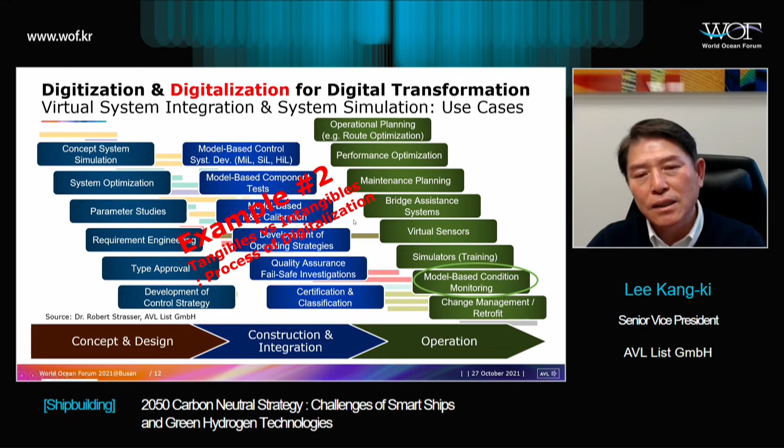But what we want to achieve in this session is integrated digital platform creation. That is why I'd like to take another example here. When we talk about the e-navigation, automated ship, autonomous ship, or smart ship, the typical process that would take place would look like this. First, you would do digitization, which will lead you to digitalization. Then you would need to create an interface. Then based on that interface, you can introduce various processes. And the processes would be diagnosed and analyzed through analytics. That's how you would come up with a solution.

When we use hydrogen as a fuel, it needs to be stored and supplied and burned. So for each module, what would take place would be quite different from what we have seen so far. So each module needs to be digitized and digitalized and then becoming smarter. Otherwise, it will not be possible for us to achieve this fully integrated digital platform. Let me start with the fuel supply unit, the fuel injection equipment. As the previous presenter mentioned, hydrogen has such a low energy density, so it requires such a huge volume. That is why such information needs to be digitized and put on a smart platform.

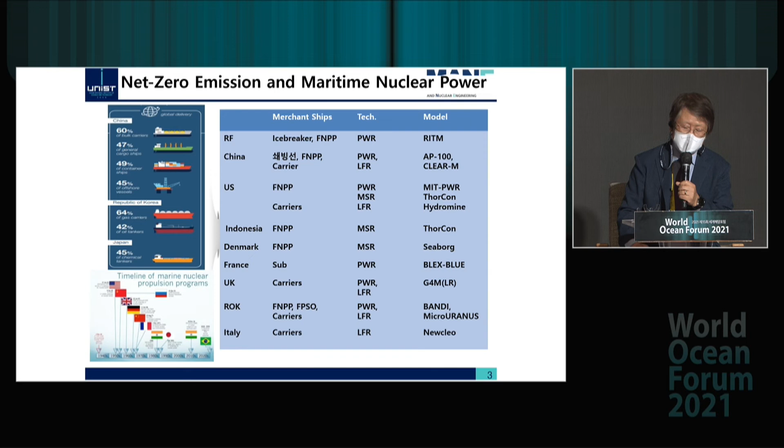And thankfully, UNIST, KEPCO, and some other organizations in Korea are also joining forces to develop the engines for maritime nuclear power. And every 5 years in the nuclear power sector, we develop a plan for promotion, and we included maritime nuclear power development in the plan. So for the next few years, we will focus on R&D, and global acceptance is still minimal.

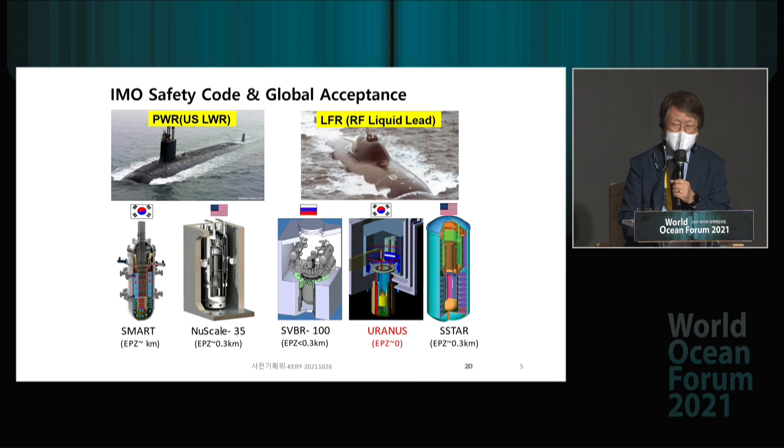And when it comes to shipbuilding industry, Korea is an undisputed leader in the world. Korea is very aggressive. And I believe that there is really a synergy between nuclear power and shipbuilding. And I believe the partnership is seriously required in order to achieve carbon neutrality. So if we could have solid partnership, I believe that this will contribute greatly to the achieving of our goals by 2050. And once again, it's my honor to be part of this auspicious panel.

Thank you. Thank you very much.

After 2040, another fuel will be pondered and developed. And he also mentioned how to use this new alternative fuel for the maritime industry. Now I'd like to turn to Dr. Lee of Korean Register for his question. Thank you.

My question, I'd like to say that I'm totally in agreement with what Mr. Yu said and Mr. Kim said. Myself, I have researched renewable energy for the past 20 years. As the professor just mentioned, as I have worked on the renewable energy, I have confronted the dichotomous approach that the nuclear power generation is evil, while renewable energy is good.

But such dichotomous approach is not right. That's what I have realized, because the renewable energy can realize its full potential only when it works on top of fossil fuel, the nuclear power, and LNG.